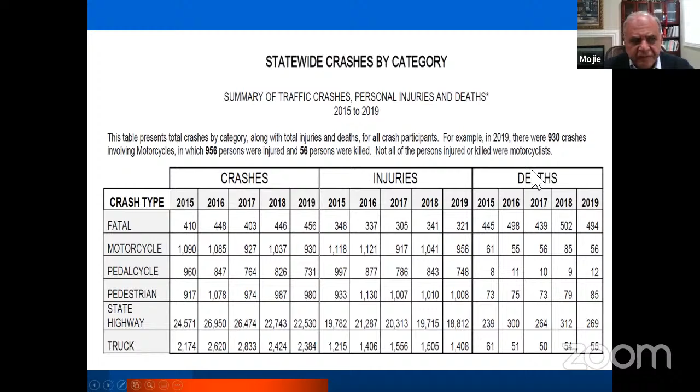In 2019, we had 494 fatalities. We had almost 40,000 injuries, 22,000 property damage crashes, for a total of 50,000 crashes. If you look at the past 5 year history, the range is about 454 to 500 per year. That's the number of fatalities. Our injuries are close to about 20,000 every year, and our crashes about 50,000 in the state of Oregon.

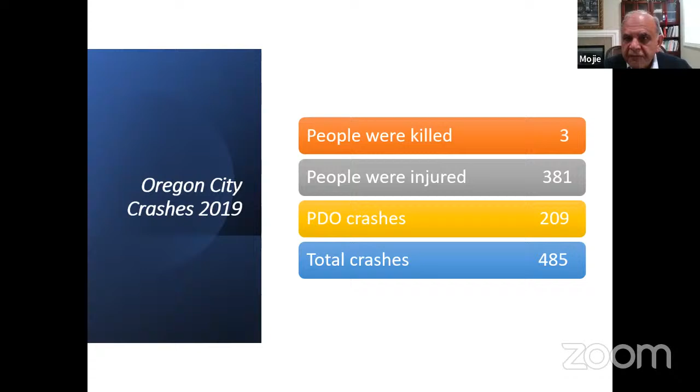Oregon City. The population of Oregon City in 2020 was approximately 37,500. In Oregon City, 3 persons were killed, 381 people were injured in traffic crashes. We had 209 property damage crashes for a total of 485 crashes. Again, what it means is every single day you have 1.5 crashes in Oregon City.

Then you're located in Clackamas County. Clackamas County had 44 fatalities, 4,278 traffic-related injuries, almost 2,600 property damage crashes, for a total of 5,506 crashes in 2019.

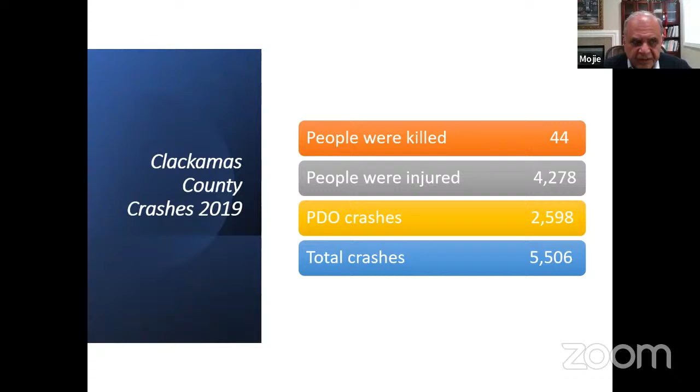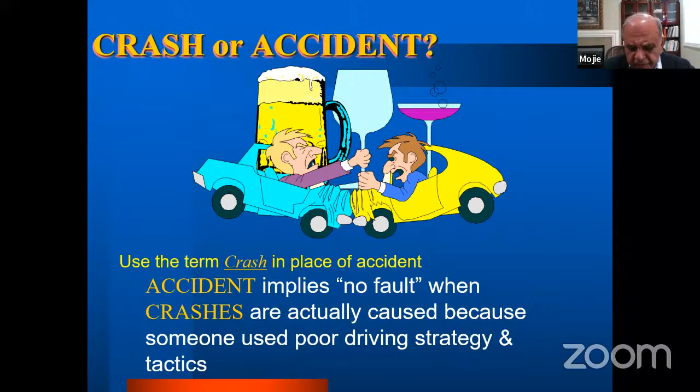One thing I like to tell you is the difference between crashes and accidents. What does accident mean? Accident means no fault, an act of God. Crashes mean someone has used poor driving tactics or judgment. Why are we calling these crashes?

If you look right here, 95% of crashes start from human error. When we look at this, 67% was at 100% fault of the human. When we add the human as well as other factors, that adds up 24% more. And when we look at it being a human problem, roadway problem, as well as vehicle problem, that adds an additional 4%. If I add all of these, it comes to 95% of our problems are related to human error.

What are the problems? Our problems are with the drivers. They're involved in speed, alcohol, or drugs. Every day there's a 911 on our roadway system.

And we have seen crashes like this in the state of Oregon. This crash happened near Hermiston, Oregon on I-84. You have to see the pictures to believe it. In this crash, 50 cars were involved, 7 people were killed, 27 people were injured.

A lot of police emphasis is on what? Violent crime. But there are more people in this country being killed in traffic crashes, and more people being injured in traffic crashes, than in violent crime.

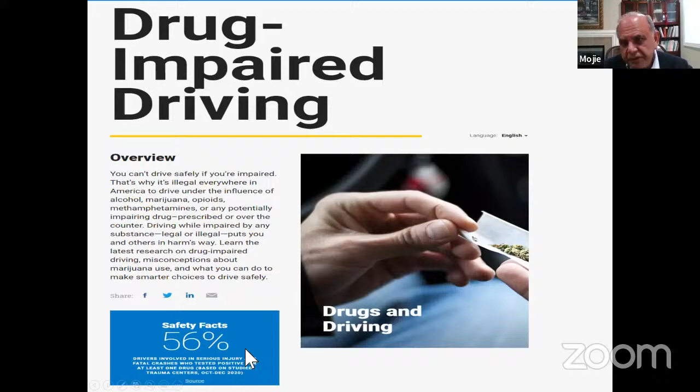What happens by tomorrow at this time? By tomorrow at this time, 107 more people are going to be killed, 7,506 more people are going to be injured, and almost 18,000 more crashes are going to happen within the next 24 hours.

Some of you remember those images. That was the darkest day in US history, September 11, 2001. The terrorists attacked this country, and we lost 3,030 innocent lives. 1 life is too many, and hopefully it never happens again.

But since that time in this country, 743,000 people were killed in traffic crashes. In this country, 51 million people were injured in traffic-related crashes. We had 120 million crashes, and it cost us $5.4 trillion.

About 2 years ago, we had coronavirus. Today, we had 1 million fatalities related to coronavirus. Hopefully we have passed that problem. But the problem is that traffic-related issues are an ongoing problem, and we have to solve this. Some of us may not have a feeling about these numbers.

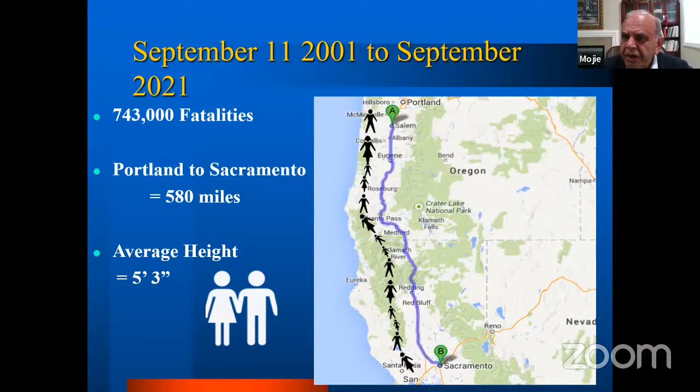Let me tell you how large 743,000 is. This is the map of Oregon, and this is I-5. Here is Portland, Oregon, here is Sacramento, California, a distance of 580 miles. I assumed the average height of the person, he or she, was 5'3". I laid down all of these dead bodies on the center line of I-5. It covered I-5 from Portland, Oregon to Sacramento, California. Can you imagine driving for 10 hours and driving over the dead bodies of the people who were killed in traffic crashes since that time?

About the injuries, when we go around the earth, it's 24,901 miles. I put the injuries around the earth. It covered the entire earth's perimeter. I still had to go a quarter farther.

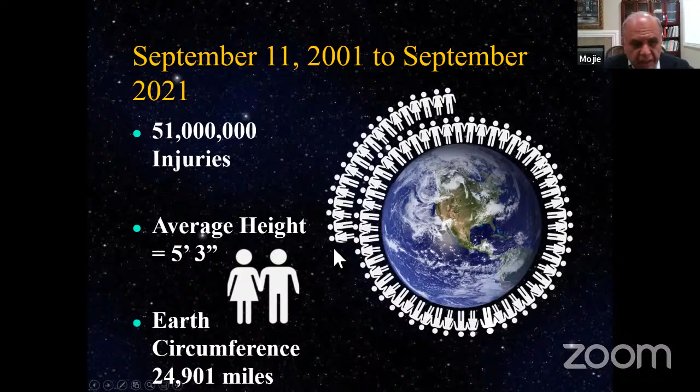About the cost, here is the earth, here is the moon. The distance is 238,900 miles. The length of a $100 bill is 6 inches. I put all of these $100 bills end to end. Every single year, you can reach from the earth to the moon with the costs of traffic crashes.

One of the major problems we are having is distracted drivers and distracted pedestrians. We are using smartphones, we are using technology. It has made life very easy for us, but it also has created its own problems. When people drive, they are being distracted by several items. One of those is texting. Others include using cell phones, eating and drinking, talking to a passenger, using a navigation system, adjusting the radio, drowsiness or fatigue, and concentrating on things other than driving.

This problem has become a pandemic by itself. This bad habit of texting and using cell phones has become like a cancer, spreading itself over the entire human body at this point, and we have to control it.

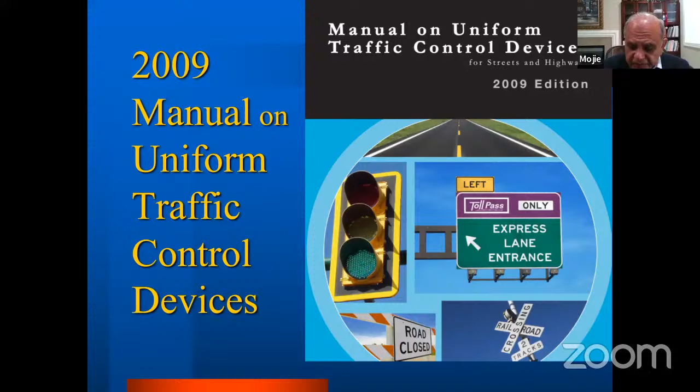Every device that goes on the roadway must comply with the Bible of the traffic engineer. That Bible is called the Manual on Uniform Traffic Control Devices. What it does is regulate the traffic, warn the traffic, guide the traffic. The current edition that we are using is the 2009 edition. And what they are, signs. They regulate the signage, markings, signals, everything that goes on the roadway.

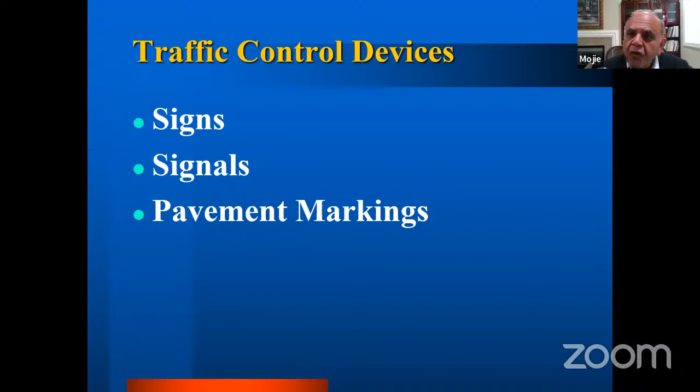We have to review this manual and see if it warrants. If it meets the warrants, then we go ahead and put those devices on the roadway system. Traffic control devices are used to regulate the traffic, warn or guide the traffic, and we use them for safe and orderly movement of the traffic.

You're going to get requests to put a multi-way stop sign. The neighbors love those devices. But I'd like to caution you about the use of those. The stop sign shall not be used as a traffic calming device.

It doesn't calm the traffic. It must be based on engineering studies. We put a stop sign or traffic signal if we had 5 or more reportable crashes in a 12 month period that can be corrected by a multi-way stop sign or traffic signal.

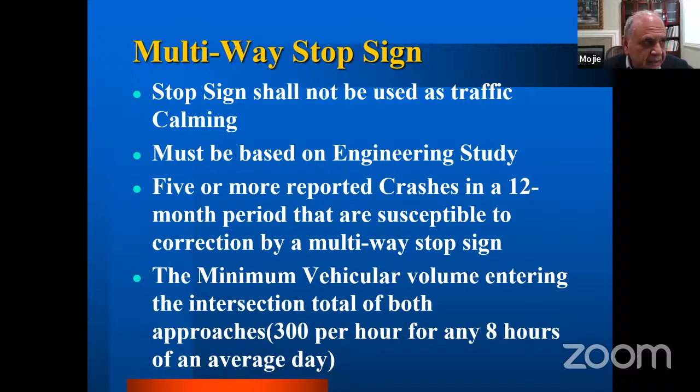For a multi-way stop sign, we also have to have adequate volume, and that volume is going to be 300 per hour for any 8 hours of an average day. So we don't just listen to our neighbors, but the engineers must evaluate it. And if it meets the warrants or the requirements, then we go ahead and put that stop sign, traffic signal, or multi-way stop sign.

Then we also have traffic signals. As I said, we put traffic signals if it meets the warrants.

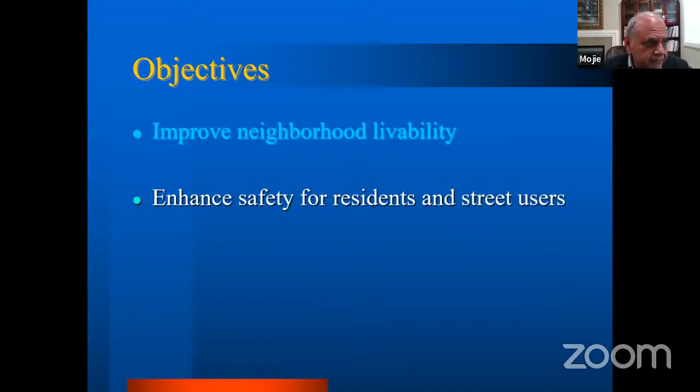For that reason, we must make our streets somehow so that the people will be comfortable to walk. So for traffic calming, we want to improve neighborhood livability, enhance safety for residents and street users, and support a multimodal transportation system.

What do we use? We use speed humps. Does it work? Yes, there has been a study by the City of Portland. When we use a series of 3 of these, it reduced the speed in residential areas by 5 to 7 miles per hour. It also reduced the volume of traffic by about 20%, because arterial traffic is not going to use local streets anymore.

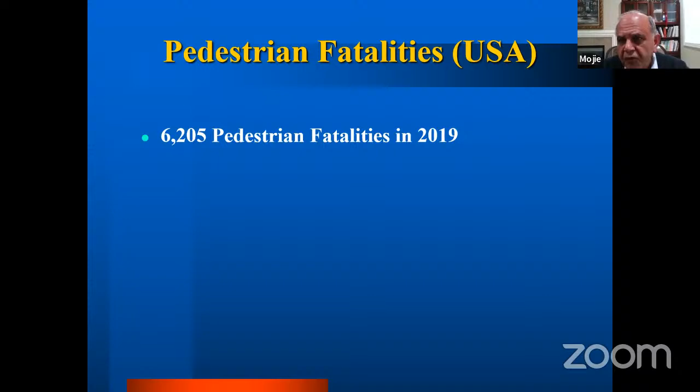Pedestrian fatalities in this country have been increasing since 2012. That was the time we started using cell phones in this country. At that time, we had about 4,000 pedestrian fatalities. Today, we are talking about 6,200 fatalities in 2019. It was the same in 2020 and 2021, and it has been fluctuating in that range for the past 3 years. A pedestrian is being killed almost every 1.4 hours. 48% of pedestrian fatalities are related either to drivers or pedestrians being impaired. 48%.

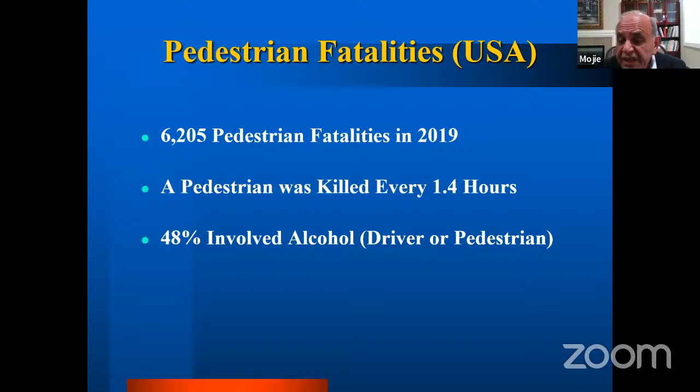Our focus has been on the intersections, but pedestrian fatalities mostly happen away from the intersection. 82% of pedestrian fatalities happen away from intersections, and only 18% happen at intersections.

We adopted the 20 miles per hour limit around school areas. What's the reason? Because if someone is hit at 20 miles per hour, the fatality rate is 5%, injury is 65%, and no injury is 30%. At 30 miles per hour, the fatality rate increases to 45%, injuries 50%, no injuries 5%. Our law enforcement officers must focus on enforcement of that 20 miles per hour limit around school areas.

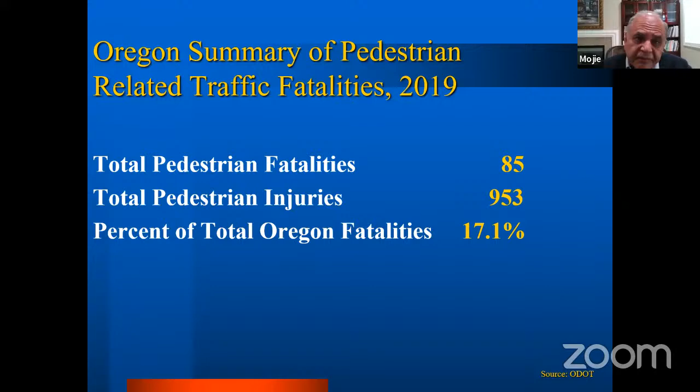In Oregon, we are having major problems with pedestrian fatalities. In 2019, we had 85 pedestrian fatalities and 953 pedestrian injuries, which was 17.1% of our total fatalities.

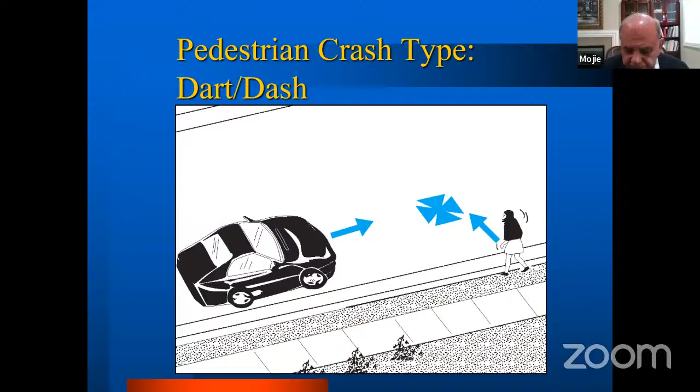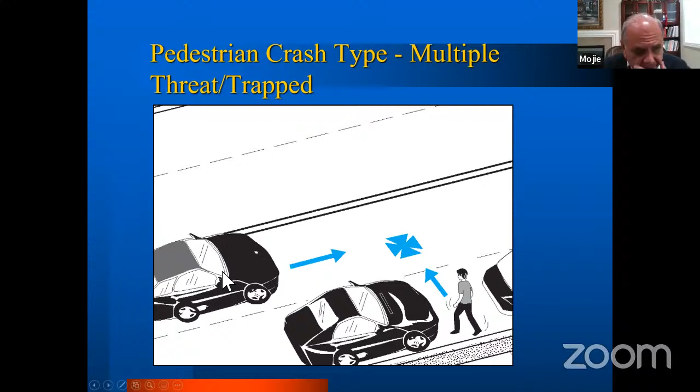How does it happen? The majority of our pedestrian fatalities happen because people just dart in. They're looking at their smartphone, not paying attention, and they think the car should see them. Obviously, sometimes the driver can be distracted as well. That's the majority of our pedestrian fatalities. On multi-lane roads, one vehicle stops, but another does not, and that's when we get fatalities or injuries. Also, people walk with dark clothing at night.

How can I improve that? It's not just an engineering issue, it's engineering, enforcement, and education. All three of those groups must work together to solve pedestrian fatalities.

You're going to get a lot of requests for crosswalk markings. Not necessarily will putting those white lines improve safety for pedestrians. First of all, it must be at the proper location.

We must have high visibility pavement marking. We must have good illumination. If you don't have good illumination, don't use it. We must have adequate signing. If it's at mid-block, we must have an advance stop bar.

Again, as tools, if it's going to be curb to curb with a very long distance to cross, we want to use a raised median. And to slow down traffic, we use curb extensions, which we call bulb-outs. We also use signals.

We can mark it like this, or like this, or like this. This marking is a lot more visible than that one. That's why we use these longitudinal lines, for school areas.

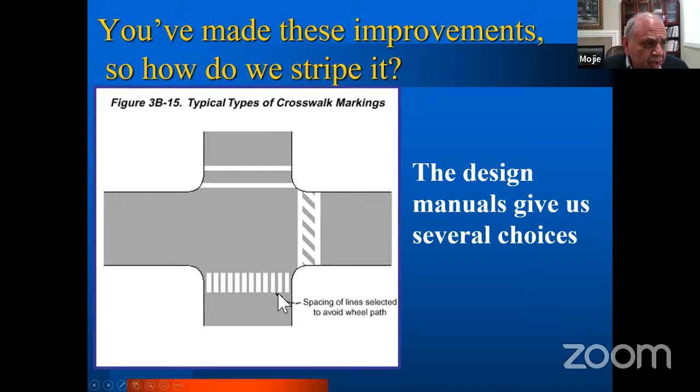Sometimes you use architectural stone, stamped concrete, or colored texture pavement. But I still like to see the white lines — see how much difference it makes when you put those white lines.

Illumination is the key factor. Especially at mid-blocks, do not use crosswalks at mid-block if you don't have good illumination.

There was a study by a gentleman who is one of the most knowledgeable people in pedestrian safety. His name is Mr. Charlie Zegeer. He did a study at 2,000 locations — 1,000 of those were marked with crosswalks, and 1,000 were unmarked. His conclusion was that there were more crashes at marked crosswalks compared to unmarked ones at mid-blocks.

Why? Because sometimes it gives pedestrians a false sense of security. When you ask the public, they like those crosswalks. When we ask traffic engineers, they're very careful where they put them. If we put them everywhere, they lose their effectiveness. So we put crosswalks only at locations where they're really needed.

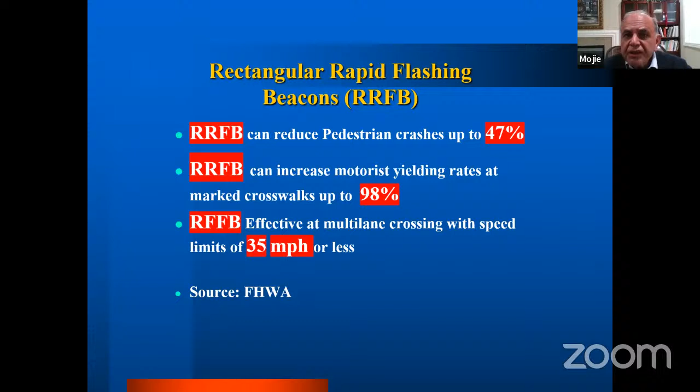This is a study done by the Federal Highway Administration, a recent study from 2021. We use this device around school areas at mid-blocks where there are crossings, and it has been a wonderful device. They are expensive — each of those posts may cost about $12,000 to $15,000, up to $20,000.

We do have speed problems everywhere we go, and in Oregon we have that problem too. These are speed-related crashes. In Oregon in 2018, we had 502 fatalities. 146 of those were speed-related, which was 29%. 142 of those were alcohol and drug-related.

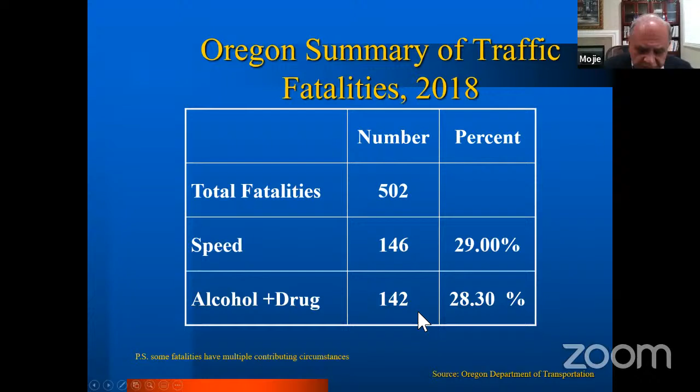What shall we do to solve our problems? We must have a high-profile public information campaign against speeding. We must ask for enforcement, and enforcement must be visible and frequent.

We don't want our enforcement officers to hide themselves. We like that they show themselves. I like to see those black and white cars. I like to see those lights flashing. When the light is flashing, it brings a lot of motorists into compliance, and people remember those lights for six weeks.

Enforcement should be planned at varying times and locations. We don't want it to be an invited guest. Traditional enforcement is the best. Automated enforcement we use to enhance the limited resources that the police have.

Neighborhood speed watch is another tool we can use. We have speed display reader boards. For those of us with bad habits, when it picks up our speed and says 35 miles per hour, we think, oh my God, the speed's supposed to be 25 miles per hour. For a lot of us, it's a good reminder, and it changes our behavior.

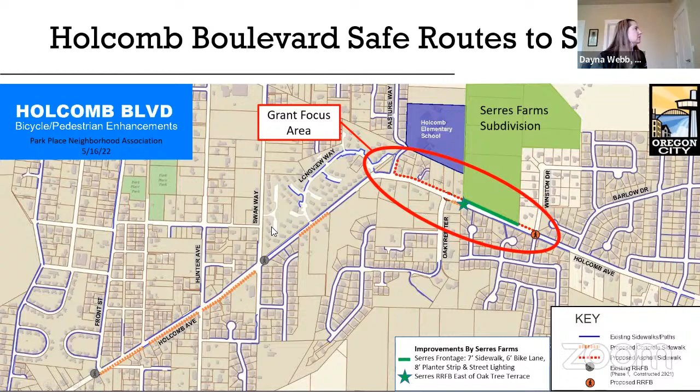Apparently we had some kind of a spam bot fill out our survey, so we had to do a little cleanup of the data. We ended up with 183 responses that we believe were true or real.

So just a high level summary: 55% of respondents feel safer walking or using a mobility device now. 53% feel safer getting around by car. 55% find it easier to access the businesses. And 67% believe the area feels more welcoming and user-friendly.

We also asked if people utilize TriMet service, and of those who answered yes, 55% feel safer or more comfortable waiting for the bus now, and 64% believe the bus stop locations are an improvement. So just a little bit on the metrics of those responses.

And then some of the key themes that we heard. We had an open-ended question at the very end where folks could provide their feedback, and we did get a decent amount of positive feedback. So we feel that most people appreciated the project.

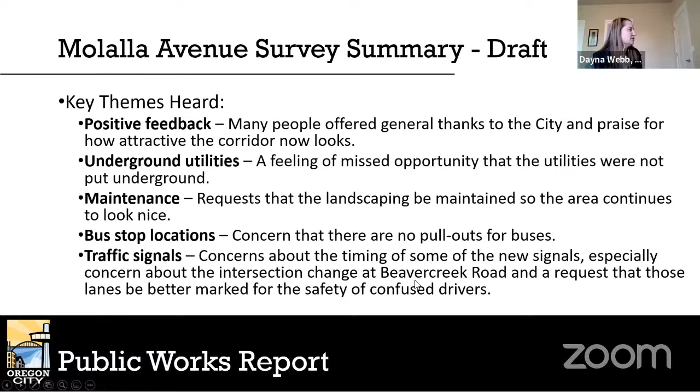All right, so I wanted to talk just a little bit about bus stop locations and the discussions we had with TriMet. I know it sounds like there were some concerns that maybe we didn't do enough coordination with TriMet for the bus stop locations.

So this is sort of my bus stop 101 class. TriMet and transit agencies use terminology: near side, mid block, and far side. In this case I'll talk about this from the perspective of Molalla at Gaffney.

So in that case, the bus goes through the intersection and you place the bus stop far enough that the bus is clear of the intersection.

This is one of the things that we discussed with them, and this was a little bit of a tough one, but this is one that they really wanted to move to the far side.

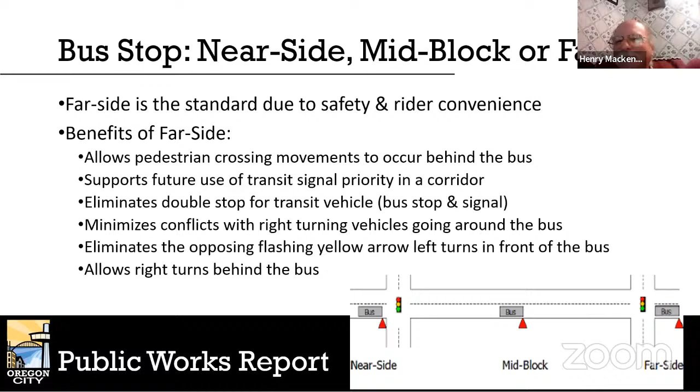So moving on to the next item, Dayna, please.

At the April meeting, there was also some questions about ADA ramps, I think related to the project on 4th and 6th Streets. That was my point, those were my questions.

So I thought I'd give a quick rundown of how we determine which ramps we rebuild with a project, and what kind of projects do and don't require ADA ramps to be put in. So when are ADA ramps required to be rebuilt?

Anytime you're doing a modification to the pedestrian crossing, such as adding a pedestrian refuge, that would require ramps to be rebuilt. Anytime you're doing paving, so if you're adding any thickness to the road surface, either removing and replacing or overlaying a roadway, requires that. So curb to curb paving, building or rebuilding a traffic signal would require new ADA ramps.

If you're doing alterations to the curb line adjacent to that ramp, you would need to replace the ADA ramp, and then again, all new construction.

So what kind of things don't require ADA ramps to be built? If we're out replacing signs, changing the striping, adding a marked crosswalk, chip sealing, which is a very thin layer of asphalt, as well as fog or slurry sealing, do not require ADA ramps to be replaced. Patching potholes do not require it, nor does patching a utility trench.

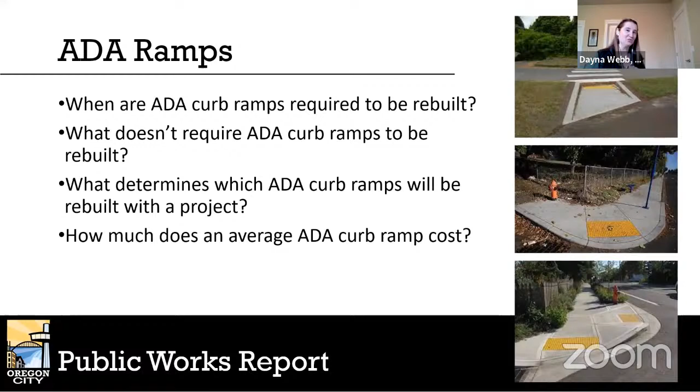I have one more topic, just a quick note on this one. We've traditionally done kind of this one ramp in the center, which works well for people with good vision or mobility devices, but people with low vision or no vision struggle with where to cross, which direction to cross the roadway. Not all intersections are 90 degrees, so we've really started moving toward a standard of the directional crosswalk so that a low vision or no vision user can identify which direction they should cross the street. That's just one more little piece to the ADA component.

So currently right now, we have a survey out to those that ride the shuttle. That's being advertised for the most part on the shuttles. We want to understand the riders that are using it now and what they like and don't like about it. Then in June, we'll be starting a survey for those that do not ride the shuttle, trying to identify why they don't ride it, so that we can use both the ridership numbers, what we think is happening as the city and county staff team that oversees this, and then take those results of the rider and non-rider surveys with the hope that we'll come out of it with a modification to the route that meets everyone's needs and helps us grow our ridership.